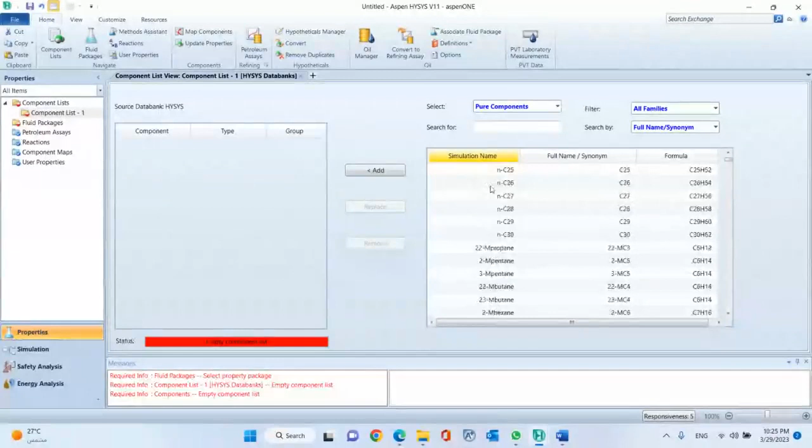So once you start a new simulation in Aspen HYSYS, it will direct you through the properties environment. In the properties environment, you will need to identify what are the components that you will use in your system. For example, when I click on add, it will give you a huge database of components, from hydrocarbons to petrochemical products, and many.

So the way you search for a component is basically you can scroll, or you can type in the components that you're looking for, such as hexane, water, and then once you find your component, you can double click or you can click add and it will appear on your selected window. So once you select your component, you will need to select a fluid package.

What is a fluid package? A fluid package is nothing but a set of thermodynamic equations of state. And if someone can remind me, why do we use thermodynamic equations? Yes, go ahead, please. To correct the non-ideality of the solution or the gas.

Correct, yes. But I want something more basic, like, let's assume that I'm gonna use an ideal equation of state. So why do I need it? To minimize the percentage error, because the fluid package gives you more precise values. But what will be the outcome from the package? To get the other properties: if I have one constant property of a gas, like the pressure, I get the other properties by the equation of state.

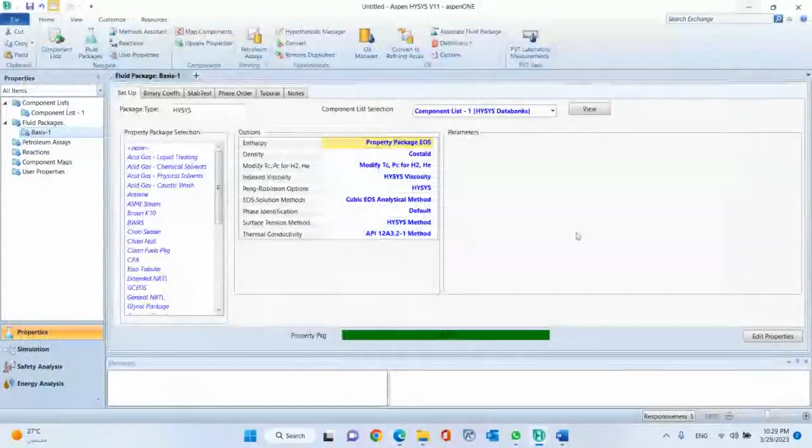I'm not sure if someone is raising hand or something, but I would prefer if we can just open the mic and let us chat together while I'm viewing the screen. It will be hard for me to read the chat.

I think it depends on the pressure and the state of the component itself. For example, if it is liquid, you cannot use the virial equation of state. And if the pressure is high, it's preferred to use the van der Waals equation. Excellent. So pressure can play a role. Why is pressure important? I mean, what does it mean if the pressure is high?

If you recall from the ideal gas equation of state, what are the assumptions that we have? That the pressure is what? Proportional to the temperature. When you increase the pressure, the temperature will be lower. But is the ideal gas equation of state applicable at high pressure or low pressure? Low pressure, almost 1 bar or 1 atmosphere.

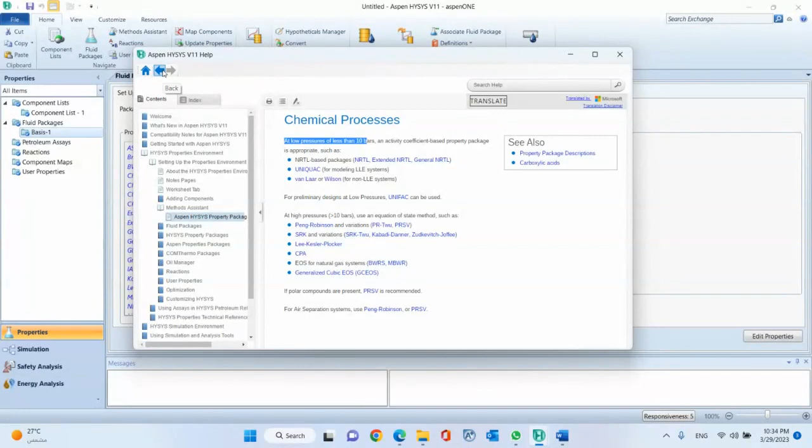So you can take a look at that, and from those lists, it will guide you to the most appropriate fluid package. Other option is that you can actually go through the literature and explore yourself. For example, if you see a literature that is utilizing process simulation or calculating thermodynamic properties for a certain set of system, then you can see and correlate what is the most suitable equation of state to use. Else you can go to the help document, which is very useful.

So normally this is, let's say, the most basic function of the first environment, which we talked about, properties. This is where you set up your components and the basis to calculate your thermodynamic properties of a system. It is very simple. Sometimes you can actually have a mixture of components, such as, let's say, methane, ethane, butane, etc., like a mixture of hydrocarbons. And when you have a mixture, you have interactions between the two components.

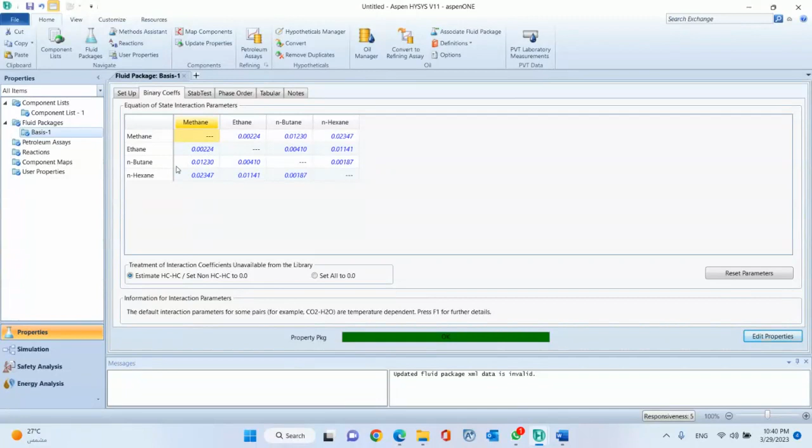However, for most of the cases, especially when you have an ideal mixture, like hydrocarbons, and especially when you are using a cubic equation of state, most of the time you will not need to define those binary coefficients, because they will pop up by default, because Aspen is storing those and it has a huge database in it. But in case it was needed, you can easily look it up in the open literature. They are widely available for most of the systems.

So while I'm explaining, I would actually like to pull up the assignments, and from there we can just have a look and try to apply the thing. Of course, I will try not to solve it, but we will try to see what are the kind of features that you will use in Aspen HYSYS to help you solve this problem and inshallah future problems that you have in your career or your academic life.

So the problem statement is to design a distillation column that will separate a feed of 50-50% water and methanol at 25 degrees Celsius and 1.4 bar, with methanol recovery of 95% in the distillate and recovery of 99% in the bottom. So we are assuming a total condenser operating at 1 bar, and we are using SRK as the property method.

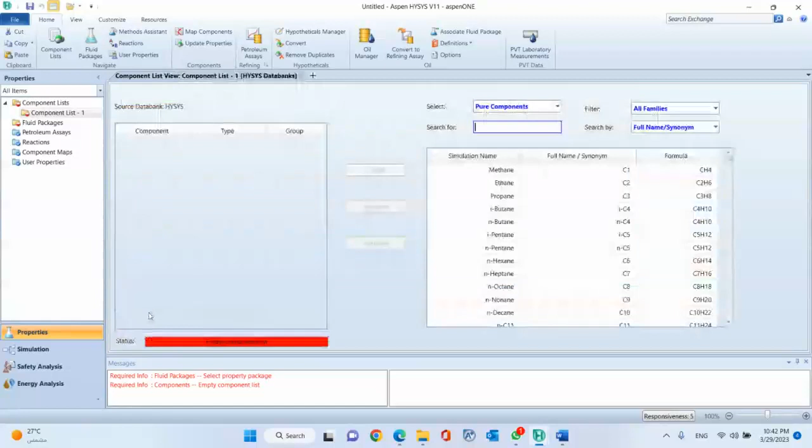So we know we have a system that is consisting of water and methanol. So if I open a new case, again it will take me to the property environment. The first thing is that I need to define my components. So I just simply click add, and from here I just simply type in the components that I'm looking for, such as water and methanol.

You can, by the way, search by the name, or you can search by the chemical formula. So you will have different options. Let's say, for example, if I want to select ethylene, which is C2H4, I will search by the formula and it will give it to me. So I've selected my components, and I see the green mark is ticked. That means I fully defined the component list.

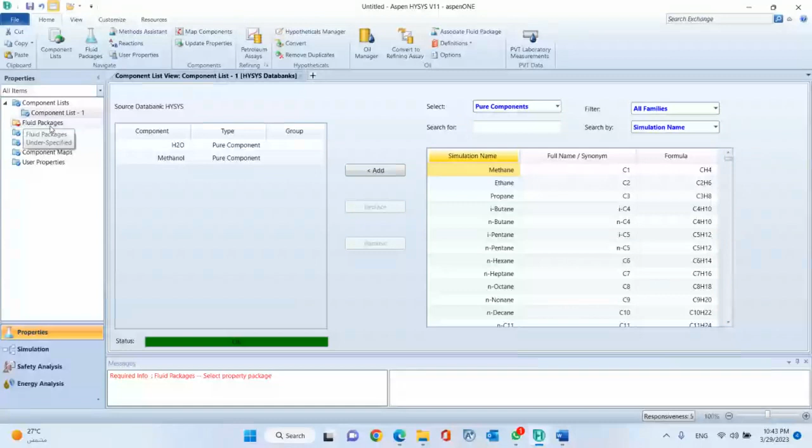The next thing, which is shown in red, is the fluid package, which is the thermodynamic equations that we are supposed to select. As per the problem statement, we are supposed to use SRK as the property method. So when I click add on the fluid package, I will scroll down until I find SRK. Once I select it, you see it gives me OK green. That means there is nothing else that I need to input in the property package.

And by that, I finished setting up my property environment, and now I can move to the simulation environment to start building my flow sheet. Once you open up your simulation environment, you will have your flow sheet, your top ribbon, and the model palette, which includes all the unit operations or logical operations that you will be using to build up your flow sheet.

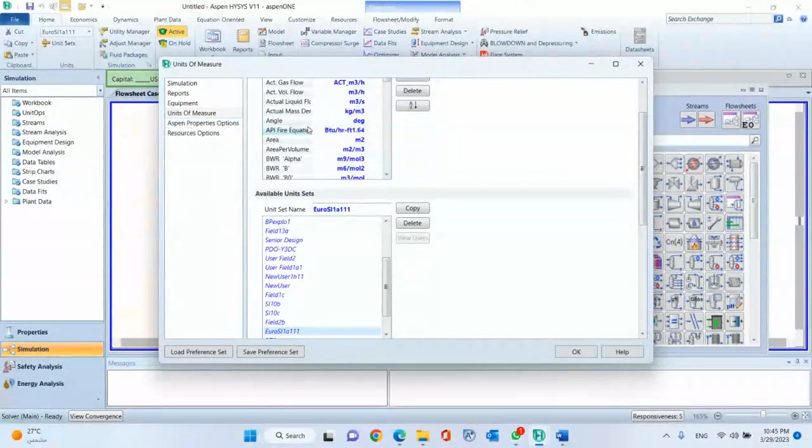Just quickly, I want to give you an overview of the several different functions that we can use in the simulation. Starting with the home tab, this is where you define your unit of measurement. If you are interested to customize your units, let's say your energy, rather than calorie, you want it in kilowatt or megawatt, you can change that, and you can do the same for mass flow rate, pressure, temperature, etc. You can select your preferred set, like SI unit or English unit, etc.

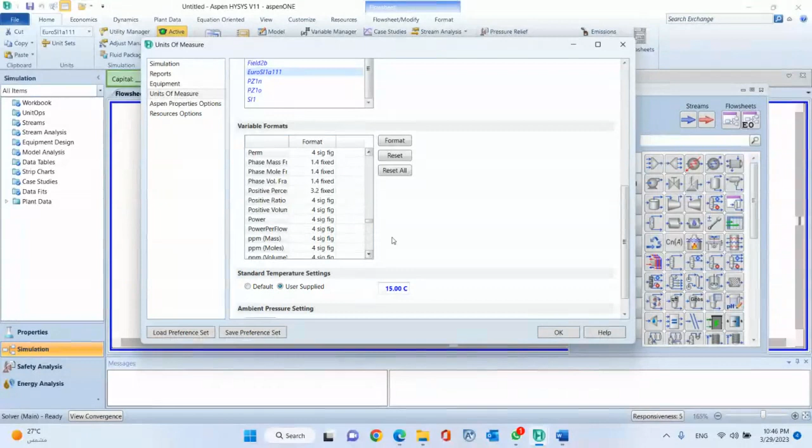And you can also customize the display of your numbers, for example, how many decimal points, how many significant figures you need for each of the variables. You can also define your standard temperature and ambient pressure here. Most of the cases you don't use those, but in case you want to define your standard volume flow rate, you will need to play with those parameters. Once you are happy, you can click OK, and you have your unit of measurement set.

Next, you will have your fluid packages in case you have multiple thermodynamic equations. By the way, you can use multiple thermodynamic equations in the same simulation, but that is an advanced level that we can inshallah cover in upcoming workshops. You also have your utility manager in case you are using utilities such as electricity, steam, cooling water, and you want to calculate the cost of your utilities.

This is important, which is your solver. It should be on active, because if it is on hold, your flow sheet will not solve. So sometimes if you put your input and you are trying to get the model solved, but nothing is happening, most likely your solver is on hold, so make sure you activate it.

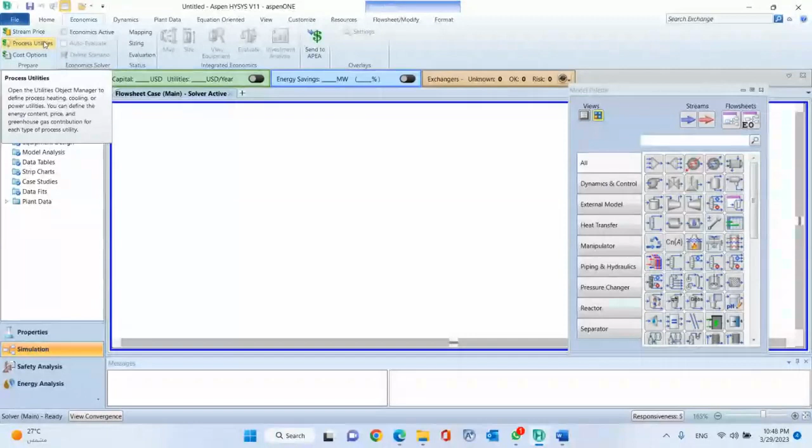You also have economic analysis, and this will be helpful for you in your senior design year project, to help you in the simulation when you are doing your process economics, and it will also help you in your career to quickly build up your business case.

Most of the cases we are dealing with the steady state, and even when you go to the plant, the majority of the cases that you will be dealing with is a steady state. Can someone tell me what a steady state means? What does it mean when they say the process is in a steady state? Does not change with time.

Yes. So the variable is constant with time, although in reality you will not see a variable like a temperature that is constant over time, but on average the fluctuation is considered like a steady state. So that's why most of the time in real life we simplify the process to be a steady state. Otherwise, it will always be complicated to solve an issue or to model a process in real time.

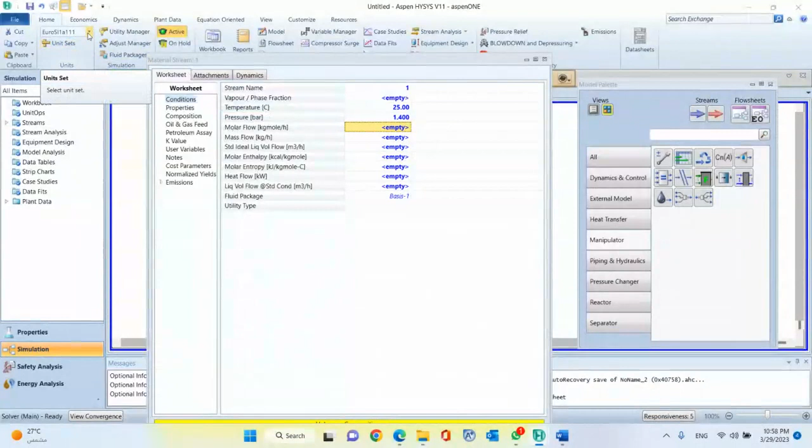Okay, so in our case, we are given the temperature, which is 25. We are given the pressure, which is 1.4 bar. By the way, as you can see here, the units are set to Celsius, bar, kilogram per hour. If that is not the case for you, you can change the units from the unit set that you have in here, or you can build your own.

Next, we are given the molar flow rate, which is 100 kilomole per hour. So in this case, I will input the molar flow rate. You see here it says kilogram mole, which is the same as kilomole in our case. And then it is a 50-50 mixture. Normally I don't write the numbers directly. I would go to edit, and then specify whether I need to define it on mole basis or mass basis, or in terms of flows rather than fractions. In our case, it is 50-50 mole percent, so I'd keep it at mole fractions, which is 0.5.

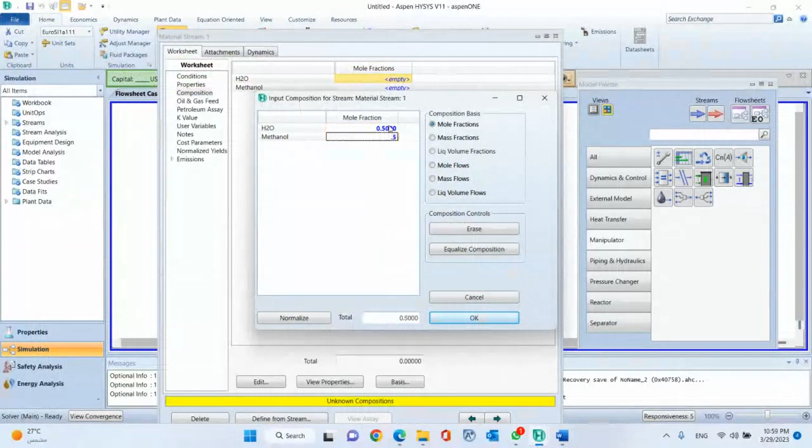So once I click OK, you see the status turns into OK. And if we go back, we see the rest of the variables are defined, and you can also see the properties here populated, like density, molecular weight, heat capacities, etc., which are calculated using our thermodynamic equations of state. So we have defined our stream.

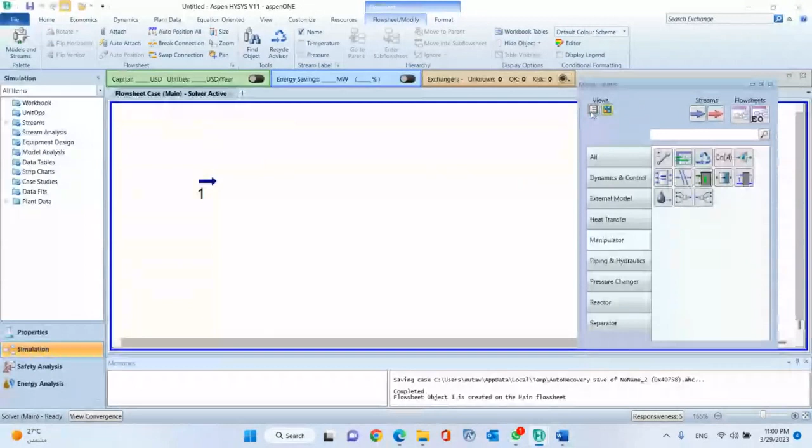So let us explore some of the tasks and some of the features in the process simulation to help us conduct those tasks. The first thing is to plot the XY equilibrium curve using HYSYS. So can someone tell me what is the XY equilibrium curve? What does it give us? What is the use of it? We can determine if we have azeotropes in the mixture itself when separating the components. Exactly. So we can look at the nature of the mixture, how it is behaving. Is it ideal, non-ideal? I can use it to do the manual calculation, like the McCabe-Thiele method to determine the number of stages. I can do many things with it.

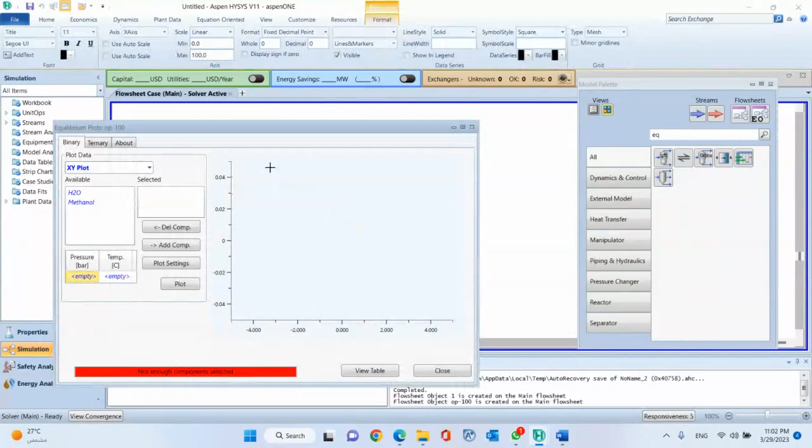So how do I plot the XY equilibrium curve? Basically, on the model palette itself, there is a unit operation which is called equilibrium, those opposing arrows that are shown in here. You can just simply double click on them, and this is where you determine your equilibrium plots, if you have a binary mixture, which is a mixture of two components, or ternary mixtures, a mixture of three components. In our case, we only have water and methanol, so it is a binary mixture.

What we need to do is go here on those components and select or add them, because sometimes you will have, let's say, 10 or more components. So whatever binary mixture you need, you should click on it and select add, so that you activate it in this unit operation.

Then what is it that you are plotting? Are you plotting an XY plot, which is the vapor versus liquid curve, with liquid on the x-axis and vapor on the y-axis, or are you looking for TXY, where you have temperature on the axis, or PXY, where you have pressure? In our case, we are tasked to plot the XY equilibrium curve, which is the selected plot in this case.

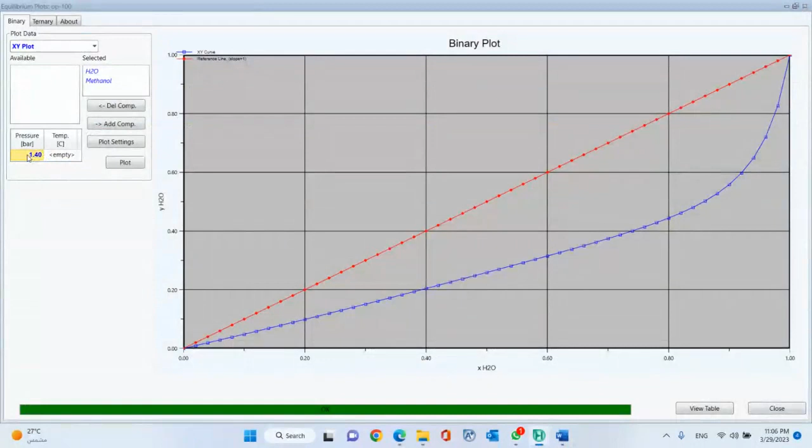You can select whatever pressure you want. It depends on the conditions that you want. Okay, so we are doing the equilibrium at 1.4 bar, but yes, if we want to do the distillation at 1 bar, then you are absolutely right. We need to do it at 1 bar, and then we can update the plot and generate it once again. So yeah, this is a good point.

You should do the equilibrium at the pressure or conditions of your equipment, not your feed, or you should know the conditions at which you are separating your components. But yeah, this is a good point. Thank you very much. So I'm hoping that this is clear for everyone. If anyone has any questions... Okay, so I'll take it that this is clear. Please feel free to interrupt if you have any questions while we are explaining.

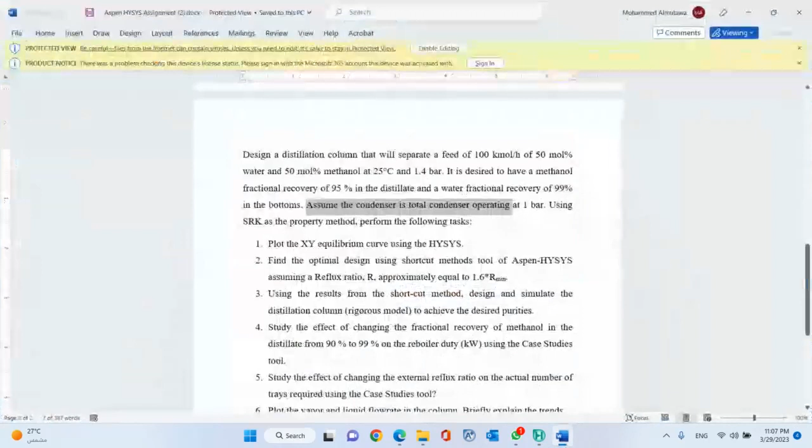Okay, so now we are getting into the heavy stuff. Our task is to design a distillation column to achieve our objective of 99% recovery of water at the bottom and 95% recovery of methanol at the top. So in 306, when you normally do hand calculation, how would you design a distillation column? What is the tool that you would normally use?

Or okay, let me put the question like this. When I tell you to design a distillation column, not sizing, but in terms of the number of stages, what would be your approach? What kind of tools would you use to determine the number of stages? McCabe. Equilibrium curve and McCabe and CMO. Yeah, and how would you use that method?

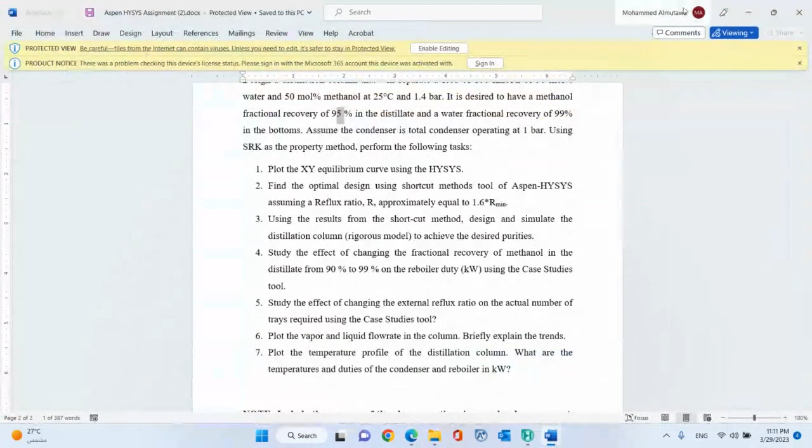So what we are going to do here is not use the McCabe-Thiele diagram, but other methods that will help us design our distillation column. Now, if I simply go and select a distillation column, this is, by the way, your distillation column, and try to define it, it will ask me to input the number of stages and to define other parameters when I try to configure it. At this stage, I don't even know the number of stages to input into this configuration window. So this will not really help me.

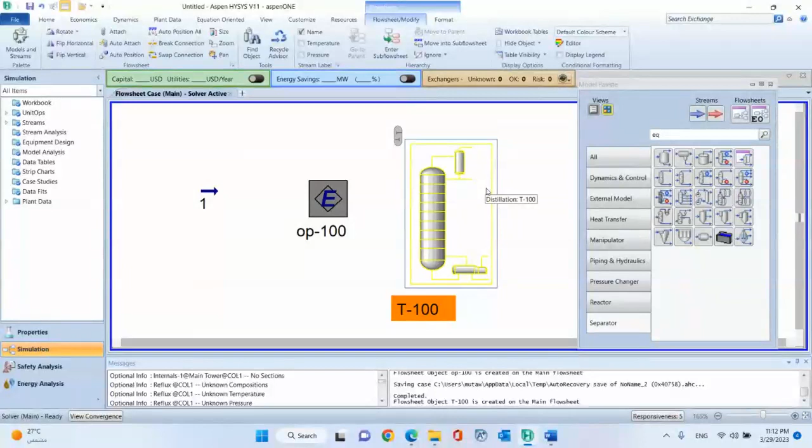So one way is that I can do the McCabe-Thiele offline and determine the number of stages and the feed stage from there. Else, I can use what is called a shortcut distillation. In the shortcut distillation, I can supply a few inputs, and it can calculate for me the majority of the variables that I would need to configure my rigorous distillation model.

So I would use the shortcut not as a final model, but I would only use it as a start guide to determine the number of stages, the feed stage, etc., like for initial results. And then I will take those results and convert it into a rigorous distillation column.

So once we have the shortcut column, basically what we need to define is the connection into and out of the column. Our inlet would be our feed, which is the feed stream we have just defined. And then I need to define an energy stream for the condenser duty. I can just write in any name like QC, which is for condenser.

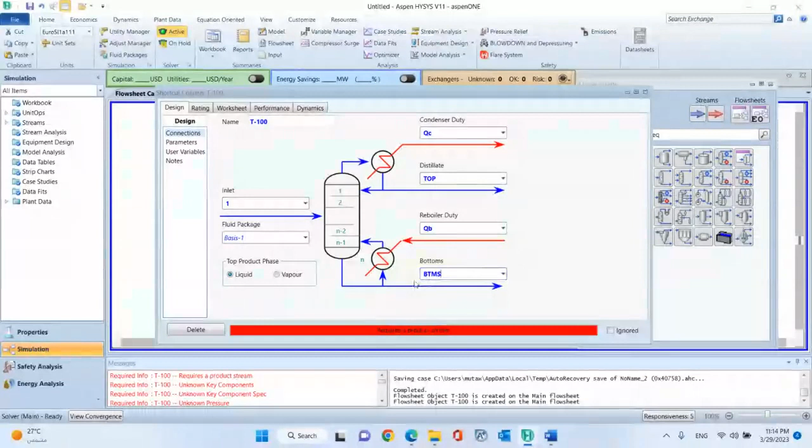And then distillate, say anything like top. And then reboiler duty, for example, QB. And then bottoms. So now it's important here to say whether our top product phase is liquid or vapor. So how do I know if my product is liquid or vapor from, let's say, this problem statement?

It says a total condenser, so it's liquid. Okay, excellent. Very good. So if we have a total condenser, we will have a liquid. What other kind of condensers might we have? Partial condenser. Partial condenser, and what would be the products out of that condenser? A mixture, gas and liquid. Yes. So it's not only vapor. Excellent.

You don't need simulation. خلاص, you can solve by your own.

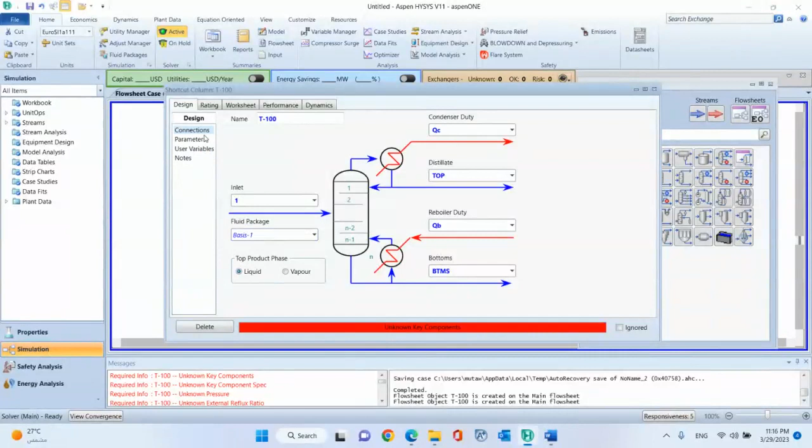Very good. So now I define the connections. In the status bar, it will give you hints sometimes what is the next step you need to do. Once we define the connections, we can go to the parameters tab. And in the parameters, I define, I think this is also something we have come across, the light key and the heavy key components.

What does a light key component mean, or heavy key? More volatile and less volatile. Let's say I have a mixture of 4 components: ethane, propane, butane, and pentane, for example. Will the light key always be ethane? No. Why? The light key component will be the component that we want in the distillate. Yes, exactly. Which is our main product, right? Yes. And for the bottom, which is the heavy key, it will be the same thing.

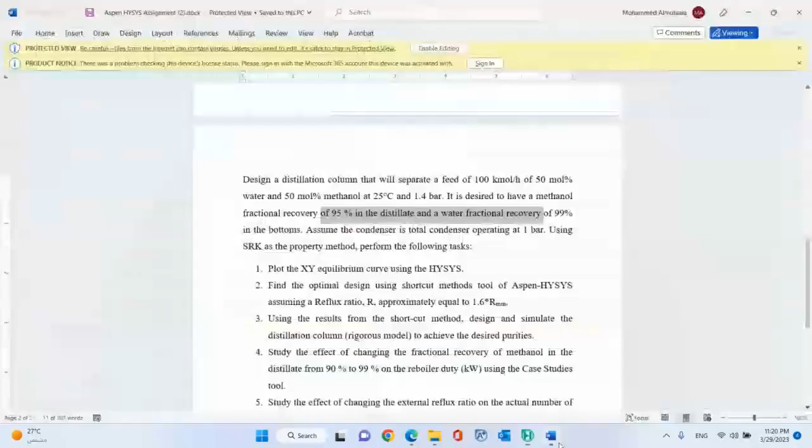Now, in the problem statement we are given a flow rate, which is 100 kilomole per hour, a composition of the feed, and a recovery. However, the simulation is asking us for mole fraction: mole fraction of the light key in the bottom and mole fraction of the heavy key in the distillate. We don't have that in the problem statement. How can we get it?

He said in the question fraction recovery is 95 for the distillate. That means D times XD is 0.95 times 0.5 times 100. And the same for the bottom. So you mean we will calculate the component mole flow rate, all right? Is that what you're saying? Let us set up an Excel calculator here very quickly.

Okay, so we have our F, our feed, and then H2O recovery, and then methanol recovery. So here we have 100 kilomole per hour, and this is 95. So this is 0.99 recovery in the bottoms, and this is 0.95 recovery in the top.

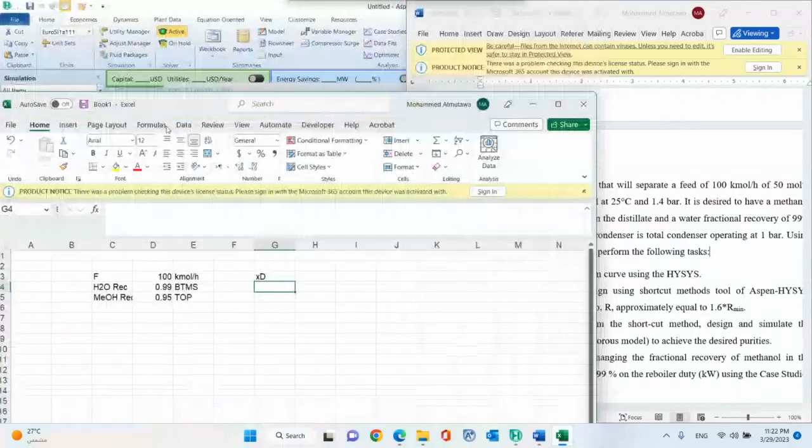So how do we get XD, or let's say, how do we get X methanol in the bottoms from the given information? Of course, we have here the composition, feed H2O, and then feed methanol, 0.5. So can someone help me how to do the calculation?

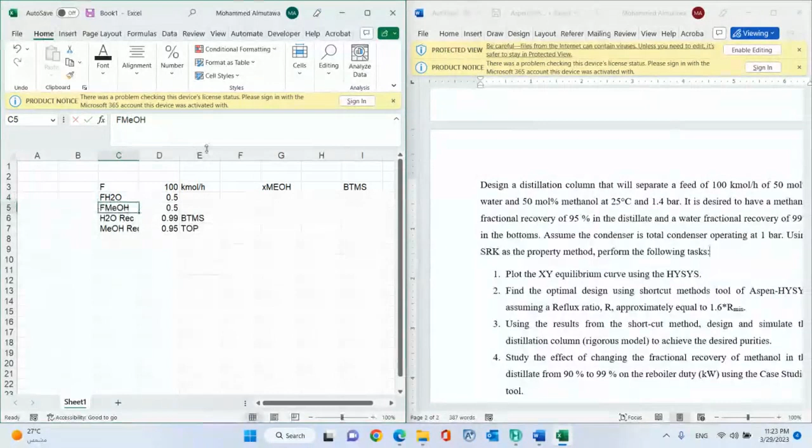We need to find the distillate and the bottoms first. Okay. You mean the distillate what, mole fractions or flow rates? Flow rate, so we can get the mole fraction. Okay, how do we do that? We can say 100 times 0.5 times 0.99 or 0.95, and then we add it to the bottoms, so we get the distillate. Okay, so what should I do? If you just guide me through the calculation.

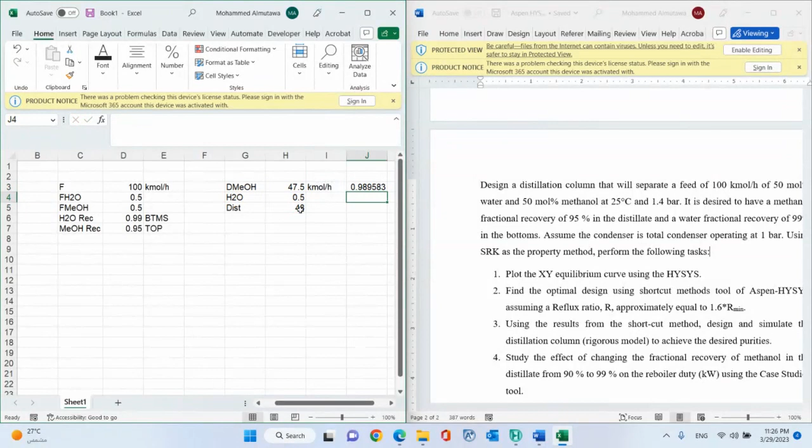And the summation, this would be your distillate flow rate. You divide the flow rate of the component by the total flow rate. This would be your mole fraction XD. However, what we are looking for, or what the simulation is asking, is the water composition in the distillate, which would be 1 minus XD, which is this value. So we need to do this for water, and then do the same for the methanol.

So what would be... 0.5 divided by 48. Divided by 48? Yes. Okay, this is the heavy key in the distillate. Yes, exactly. So it can be either 1 minus the XD for methanol, or 0.5 directly divided by 48. Now, what about the light key in the bottom? How do we find that? One minus what? For the heavy key in the distillate, you mean? No, the light key in the bottom. We already found the heavy key in the distillate and plugged it into HYSYS. But what about the light key in the bottom?

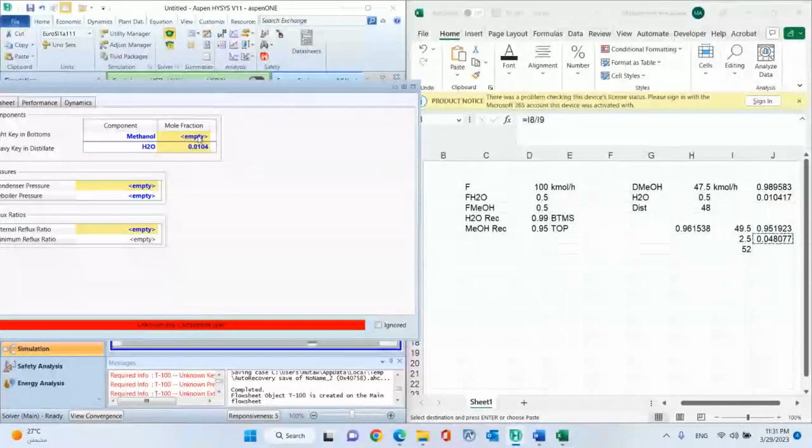Let us do the same practice, and this will be your 49.5, and then what would be your methanol? Multiply this by 0.05, correct? So your water would be 49.5 divided by 52, which is 95%. And your methanol is actually 2.5, which is this value, correct? Yes, correct. So we have defined the mole fraction. I know it's simulation and we still had to do some hand calculation, but sometimes there is no escape.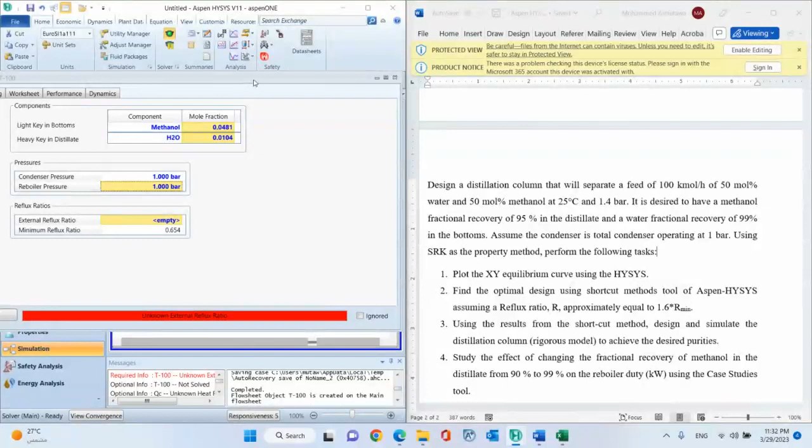Then the pressures from the problem statement. We have the condenser pressure, operating at 1 bar. I don't see anything mentioning the reboiler pressure, so we will assume 0 pressure drop across the column, meaning the reboiler pressure is the same as the condenser pressure. The simulation will calculate the minimum reflux ratio, and this is good because number 2 says find the optimal design using the shortcut method tool of Aspen HYSYS, assuming a reflux ratio equal to 1.6 times R minimum. So in the external reflux we put 1.6 times 0.654.

So once we do that, heavy calculations. Sorry if someone said something. Okay.

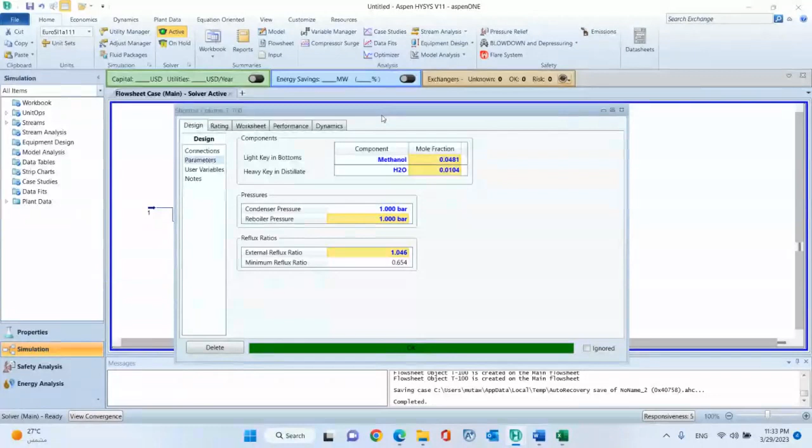Once we do that, we solve our model. So what is the goal of doing all of this? We need the stages needed for separation, feed stage, and the reboiler duty. If we go to the performance tab, we can see the calculated results: the minimum number of stages, the actual number of trays, the optimum feed stage, the condenser and reboiler temperatures, and the condenser and reboiler duties. We have those numbers in front of us.

As you can see, the shortcut column gave us the majority of the data we needed to build our distillation column based only on the product fractions, pressures, and the external reflux as a function of the minimum reflux ratio. So it only requires minimum input.

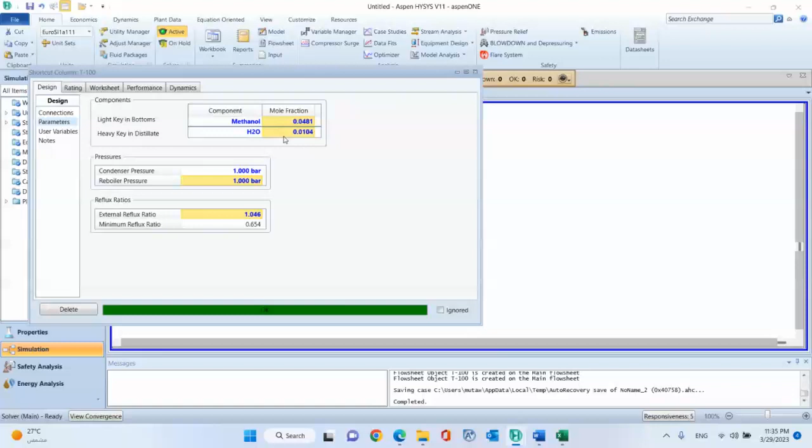And so you get your results for the shortcut here, which is the number of stages, and then you can also get your product stream properties from this worksheet, as well as the compositions. So now you are able to obtain your number of stages, or let's say your distillation column design.

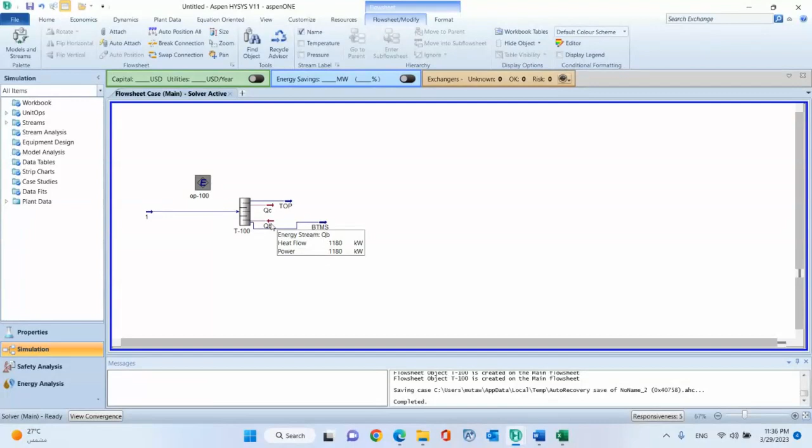So far, anyone has any question on whatever we have done? Or, inshallah, you will feel confident that you know how to use a shortcut distillation column. Explained properly. Sorry? I said it is explained properly. Thank you.

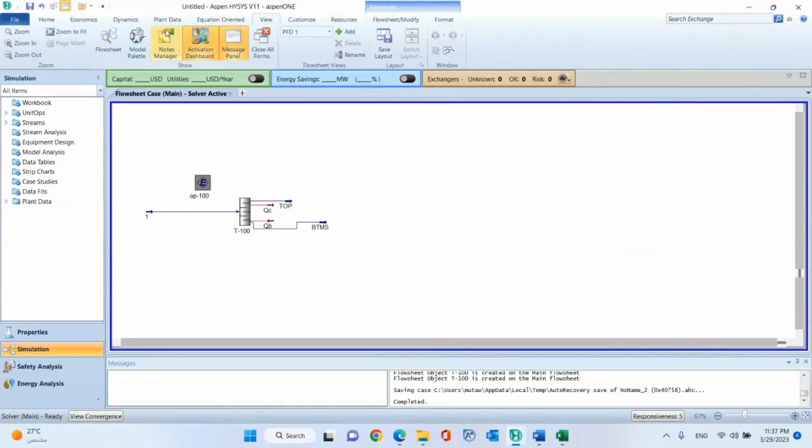طيب الله يعطيكم العافية. So the goal is only basically to get those basic data, which is the number of stages and the feed stage. Sometimes when you close this model palette by accident, you can simply go to View and click on model palette, or you can press F4 and it will pop up again.

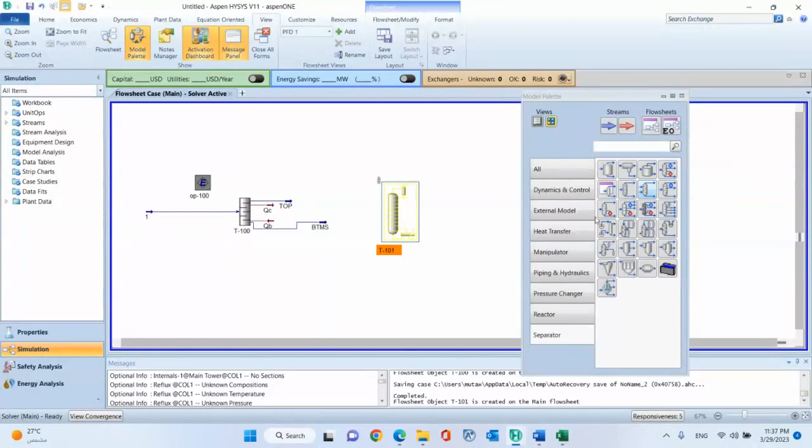So using the results from the shortcut method, design and simulate the distillation column. Next, as we said, the shortcut in the separators is not your distillation column design. It is just a way to get the data you need to design your distillation column. So you go again to separators, hover the mouse over it, and you will see that this is the distillation column. There are other columns as well, but this is what we will need.

The page is a little bit more complex, but we still need to define our feed stream and our stages, etc. Now the feed is already connected to the shortcut. So I can just type in feed, for example. It will generate a new stream for me. I will show you later on how we can define it.

Then again, I will simply redefine the streams. We said here that the condenser is a total condenser, so it will remove the vapor product. So this is the overhead. I'm just changing the names here because HYSYS doesn't allow me to replicate the names over and over. And Q boiler. And then here, this is bottoms. Okay, I already defined bottoms.

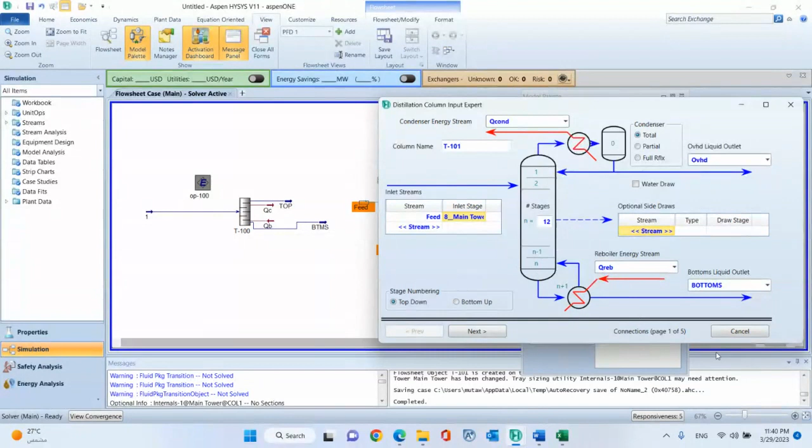Always, if you have a fraction of a tray, even if it is 0.1 or 0.9, you should always round it up. So in this case, we have 11 point something, so we should always round it up. And then similarly for the feed stage, it was 7.5, so we'll put 8. Once you define those parameters, you can simply click on next.

This is to select the configuration of the reboiler. In most cases, you don't really need to change anything. You just leave it as default. If you are simulating an existing column, for example for industry, and you know the configuration of the reboiler as circulation with a baffle, then you can configure it as that. But for now, the default is more than sufficient for us, and it is simple to solve as well.

So here we will define the condenser pressure, which is 1, and the reboiler pressure. In real life, you normally have the reboiler higher than the condenser, but it is a fair assumption to assume no pressure drop across the column so far.

If you have a complex system, a complicated distillation, sometimes you need to provide estimates. It will help in finding the solution quicker. But we have a simple system, so we really don't need to bother putting a temperature estimate. But if we need to, we already saw that we have the condenser and reboiler temperatures, so we can supply them.

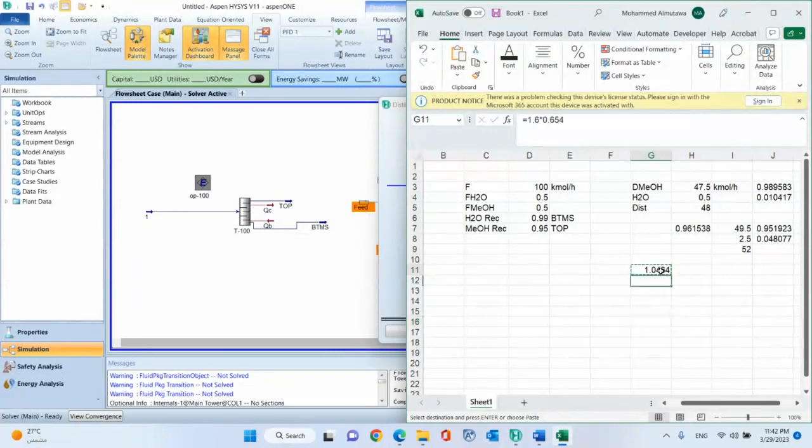So here we can define the reflux ratio or the liquid rate. We have just defined the reflux ratio here, which is 1. This value. So I will just input the value in here, and then خلاص, I will select done.

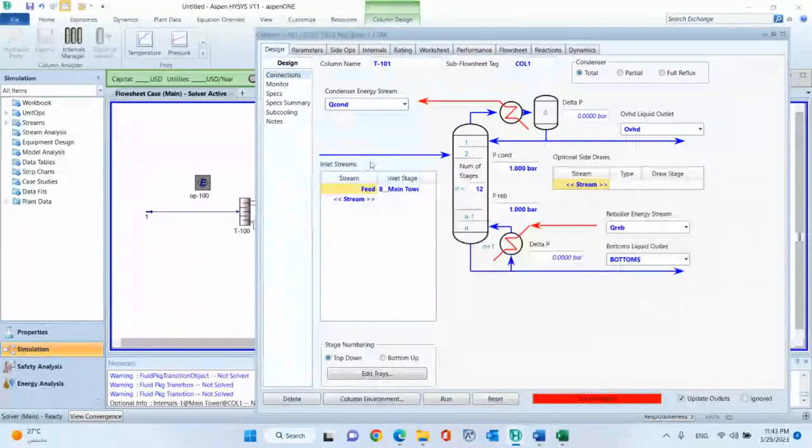We can always go back and change, add even more specifications than the liquid rate, or put nothing at all at the beginning. We will see how we can specify the column. So I will open both. Good. Okay, very good. So on the left hand side, this is the shortcut column result. So yes, I think we did the number of trays correctly. Very good.

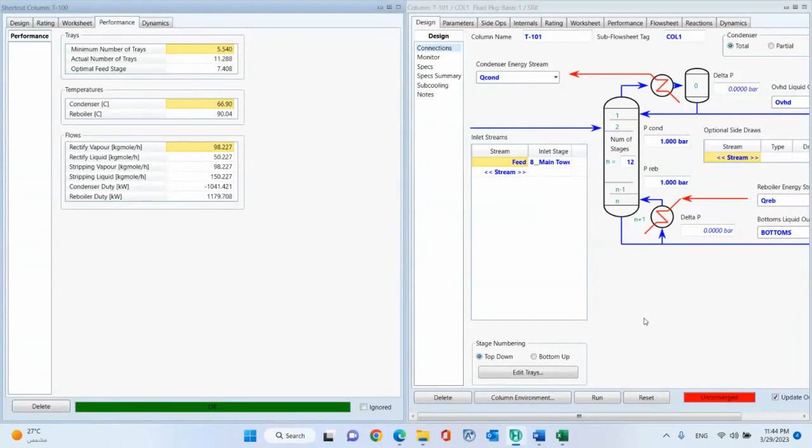So once you build your distillation column, you need to solve it. But before you solve it, you should go to the monitor. And by the way, this is maybe the most complicated system or unit operation most of the time in process simulation, and it is most of the time painful to solve.

So what do we have in here? What we can see in this monitor for the distillation column, we can see what are the specifications that we are specifying and what is our degree of freedom. So we have 2 active specifications, and these specifications indicating our degree of freedom is 0. That means we need 2 specifications for us to solve the system. So let me just deactivate those. You see the degree of freedom will update to 2. That means we require 2 information so that we can solve our system.

So I have the reflux ratio. Okay, good. That means I'm still left with 1 degree of freedom. Now here I am free. I can specify the distillate rate. I can specify the composition of the distillate. I can specify the recovery. I can add a specification here, and you can see I have many options. I can specify the duty, I can specify the recovery, I can specify temperatures, for example, across the column. So many options I have in here.

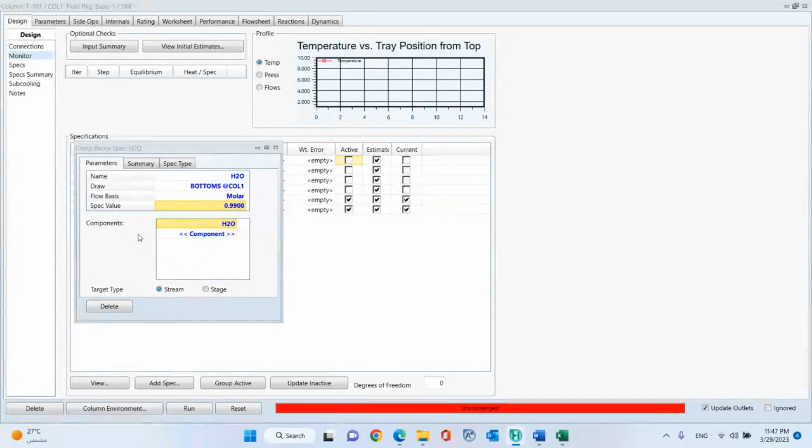I will add another specification for water, which is H2O, and this will be in the bottoms on molar basis as well, is 99% of water recovery. So this will be the fractional recovery of water, and then I will also click on exit. Now what I need to do, okay, I have the degree of freedom, I have the two specifications defined. I need to hit run. Okay, why did it not solve?

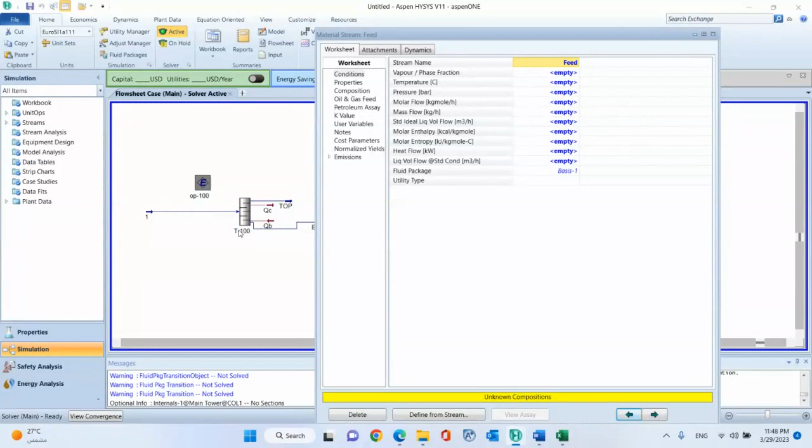Because remember, we have defined the feed, and the feed is empty here. We need to input the information. I can either do the entry of the information manually, as I did for the first stream, or I can do a quick trick and copy the information from this stream to my feed. So in this case, I select define from stream and select my stream, which is number 1, and then click OK. So it will take all the data from that stream to my new stream, and you will see all the information is copied exactly. And I can change it if I need to. Now, once I define that, you see my column has solved.

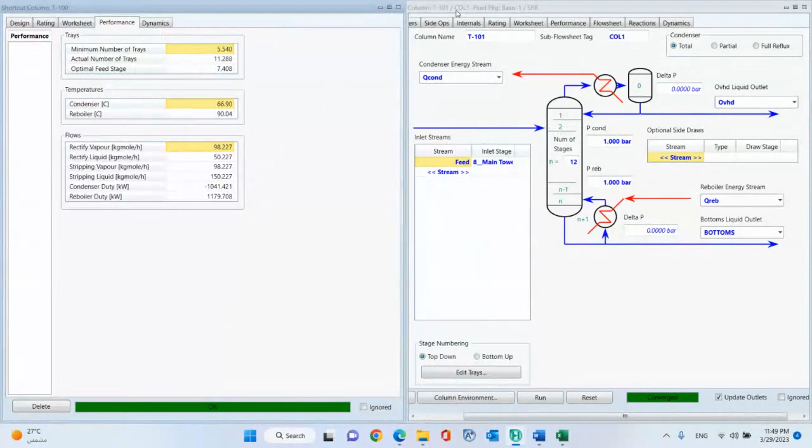Very good. So let us just quickly explore the results. Now, let us see just comparing the condenser duty or the reboiler duty, whichever. Now here, for example, the condenser duty is 1,531 kilowatt, while here it is 1,041.4 kilowatt. Similarly, for the reboiler duty, this is 1,600, and here it is around 1,200. So why do you think there is a difference?

Did we do something wrong? Maybe because in the first one, it depends on the reflux ratio, and the second one on the fractional recovery. Okay, but aren't we supposed to? Because okay, yes, this depends on the recovery, but also here in a way we input the recovery. I mean, we input the mole fractions that will basically be translated to the recovery.

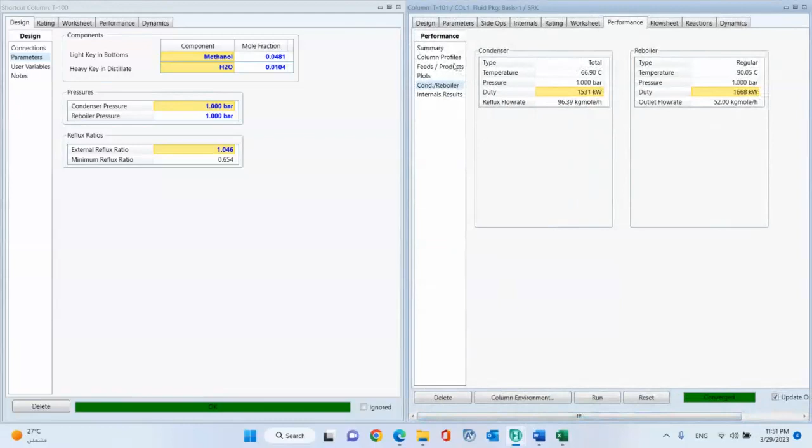In fact, let me even show you something. If I go back to design and monitor, our reflux, what we said here will be 1, right? But you see the calculated reflux is actually 2, so it's almost double the reflux that we anticipated at the beginning. So why are we having such a difference? Again, it is different equations, different models. A shortcut is a shortcut. It is a very rough, quick estimation for the number of trays, the feed location, etc.

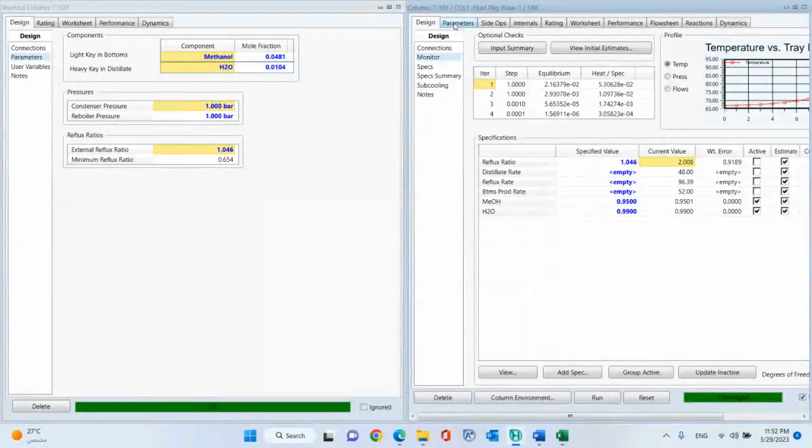While the rigorous distillation does tray by tray calculation, and it gives you more accurate results than the shortcut column. So if you are to use any of the two, you should use the rigorous distillation column and not the shortcut, because this will give you more likely reliable results.

So if I want to estimate the duty, I will not look at the duties here in the shortcut. I would rather be more confident with those values than the shortcut column, because shortcut is a shortcut from the name itself. So the calculation is different, formulas are different, and the purpose is different. Here I'm trying to simulate an actual distillation column, whereas here I'm trying to get initial estimates to build my actual simulation column. I hope this is clear.

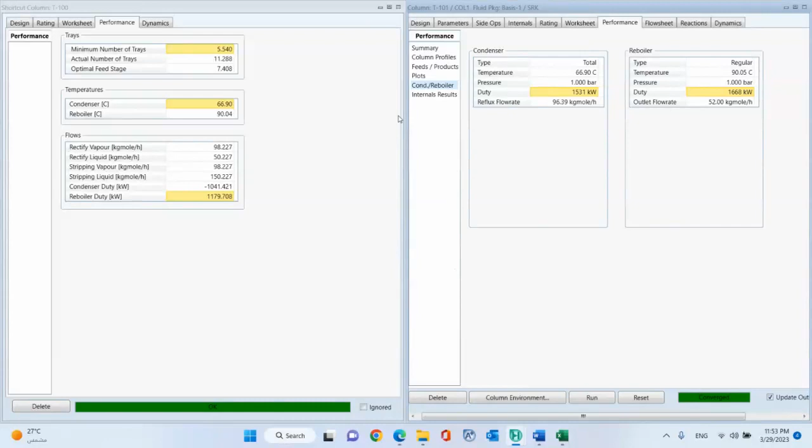Excuse me. Yes. What is the specification you put when you add the specification for the fractional recovery? What is the name of the specification? Okay, so you can add a spec. Once you click on add spec, you will have this menu. So what I selected is column component recovery, and this is just one way to specify the column.

You can specify other parameters. I can specify the reflux ratio, for example. Let me disable one of the component recoveries, and I will specify the reflux ratio. So when I solve, you see it will solve, but now it will give me a fractional recovery for water that is different than 99%, because I need higher reflux ratio in order to satisfy the fractional recovery. So I would always prefer to specify mole fractions or my target recoveries and have the other variables calculated.

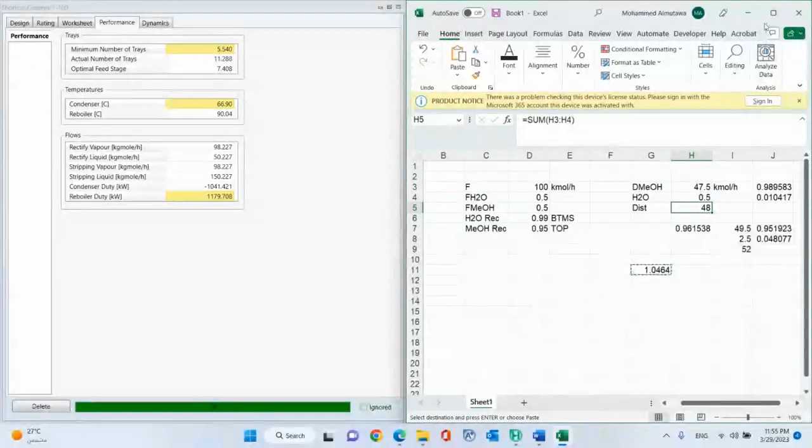Otherwise, I can specify the flow of the distillate or the flow of the bottom product, but I need to check my predicted mole fractions and all the other calculated parameters and ensure whether they are realistic, reasonable or not. So what we see, for example, distillate rate is 47.99, which is almost 48. Correct, it is matching our calculation, and then 52 for the bottom products, which is again very good.

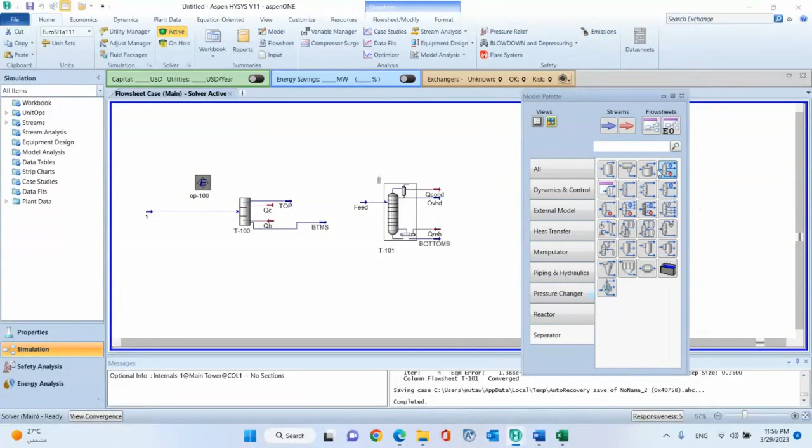It will not solve. What I did is that I defined basically the feed stream so that I was able to solve my distillation column model. Clear? Yes, yes.

Excuse me, I have a question. You said for the shortcut method, we cannot rely on the results of the heat duties. But why can we rely on the number of trays? Okay. It will give you number of trays and it will give you feed trays. The optimum feed location, right?

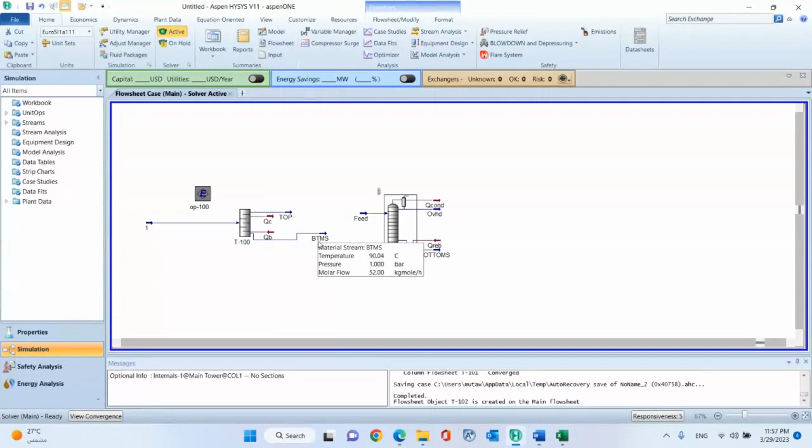So let's say you are working in a distillation column design company, even when you get those number of stages and the feed stage, and you directly try to design an actual distillation column with those figures, most likely you will not get the correct design. In fact, almost always you will not get the correct design. This is initial to help you set up your distillation, but then there will be many factors that will play.

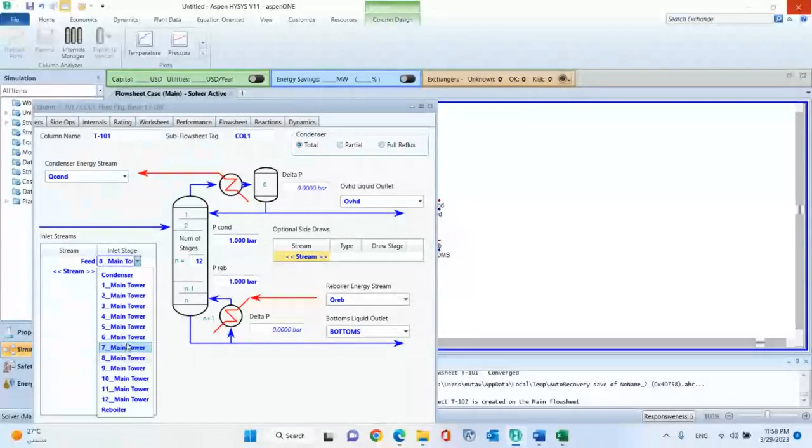And let me ask you a question. Now we selected stage 8 as a feed stage. I can maybe most of the time alter the feed stage by 1 or 2 stages and it will still solve. I can select 7, maybe it will solve. Yes, I can maybe even select 6. I think it should solve. Okay, it will solve.

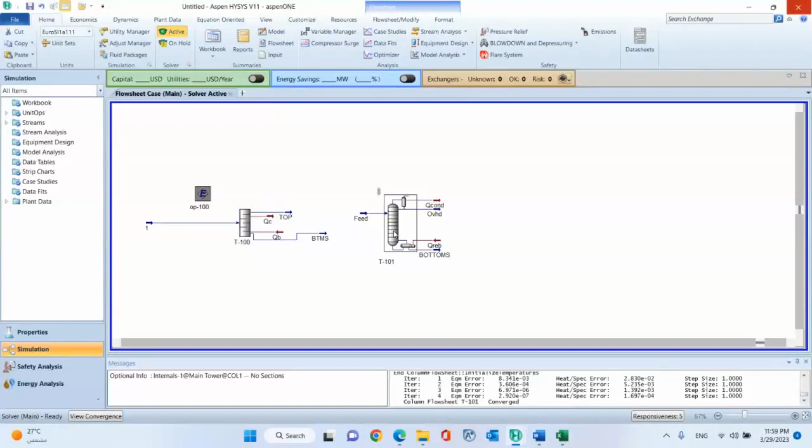So this is 12 stages. Here we are assuming 100% efficiency of the trays, which is never the case in real life. You might have efficiencies down to maybe 60%, and the efficiency will not be the same for every stage. So that means this will be only a starting point. Then you will need to study your system, and depending on the type of trays that you are configuring, which is something else you can do in HYSYS, it will give you more realistic performance for your distillation column.

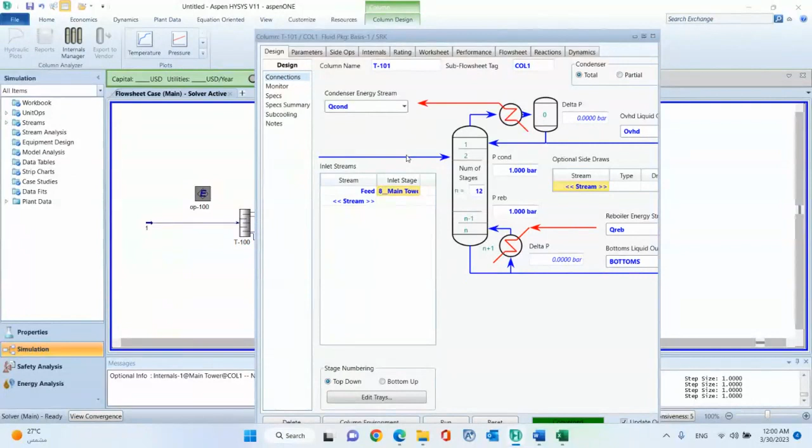By that, you might need to increase the number of stages a little bit to achieve the separation, or you might need to change your feed location to optimize the energy both on the reboiler and condenser. So the number of stages, the feed location, for our purpose here we can rely on it, but when you go to real life, you will still need to do a huge exercise in selecting the number of stages and the actual feed location.

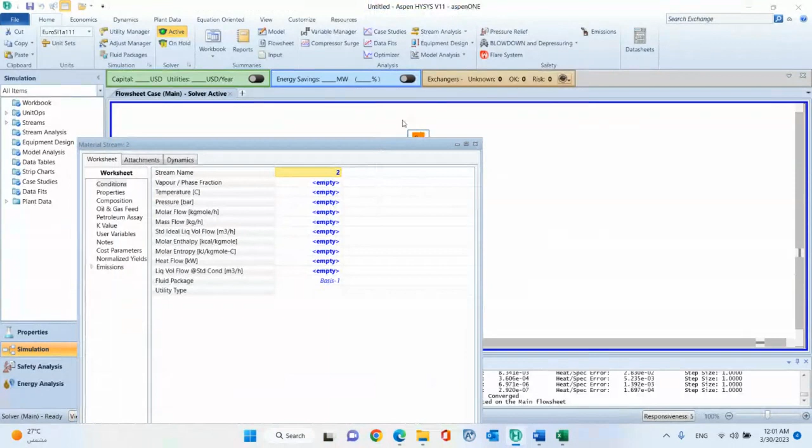I can double click, I can go to define from stream, select the stream which is going to the shortcut, click on it and then click OK. It will copy all the data in here. So this is basically what I did for the rigorous distillation.

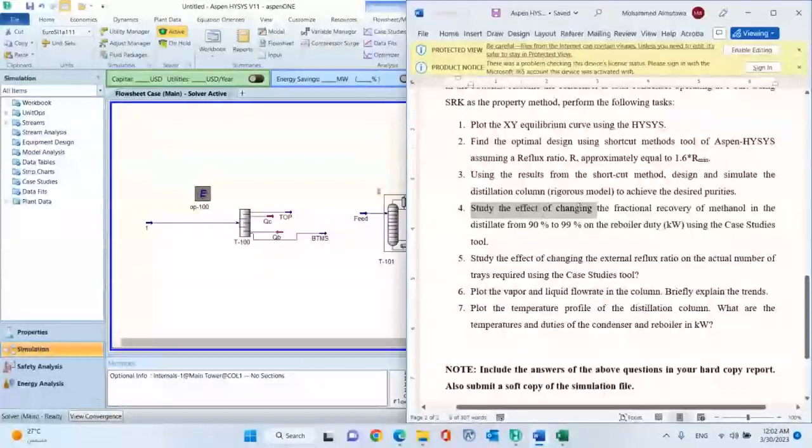Okay, so I'm not gonna attempt to solve all of the homework, but I will try to show you the tools that you would need. For example, let us quickly go through the questions: using the results from the shortcut, design and simulate the distillation column. We actually did that. But study the effect of changing the fractional recovery of methanol in the distillate from 90 to 99% on the reboiler duty, using the case studies tool.

So this is what we saw earlier. We have a tool here that is called case studies. And what this will do, basically, you are trying to study the effect of one variable on your model. So you will change one variable and you will see how the results will change. You can do that manually. I can go to monitor, change the recovery step by step, and plot the data for the reboiler duty, for example.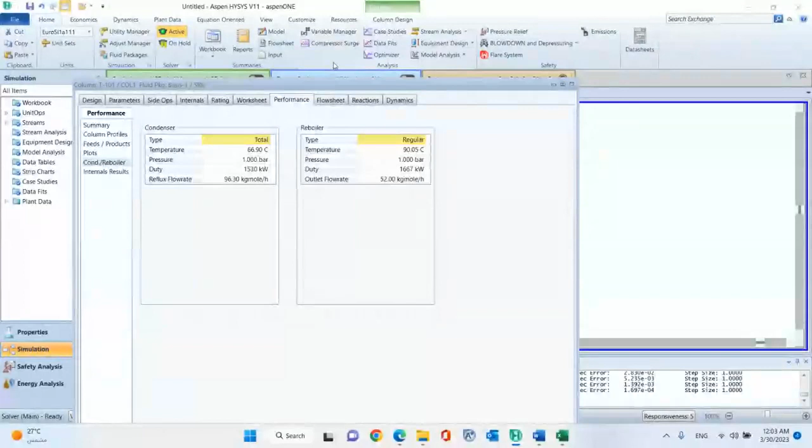In this case, it might be simple. It might not take much time, but for a more complex system, it might take a long time. So I can have an efficient way, which is case studies. So if I click on case study, I will click add. Here I need to define my independent variables and dependent variables. My independent variable in this case would be the fractional recovery of methanol.

I can define the variable from here, from variable manager, or I can find the variable. So I can go and check this is related to, for example, the overhead stream, and I can go select recovery. Main tower. Go to main again. T-101, yes. From the tower here, it is somewhere in one of those. It will take you some time to find the variable.

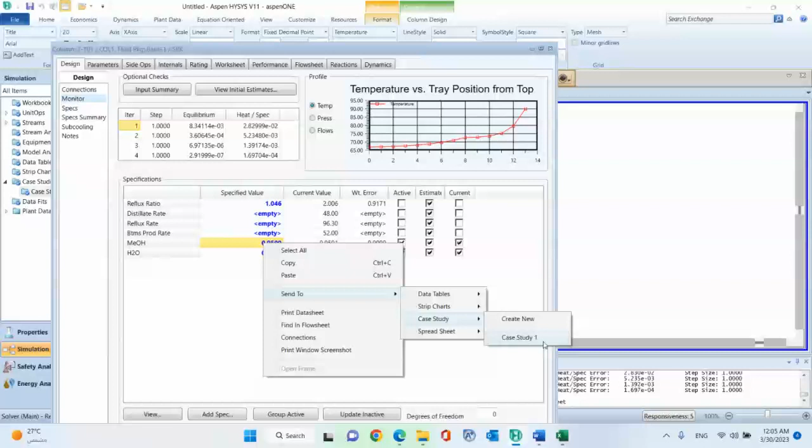So a quicker and easier way is that I can go to the column itself. I can go to monitor, and this is what I want to change, the fractional recovery of methanol. I can right click and send to case studies, then case study 1, which is our case study. Once I click that, I close, I go to case study, and I will see it populated here. I can do the same thing for the dependent variable, which in this case is the reboiler duty.

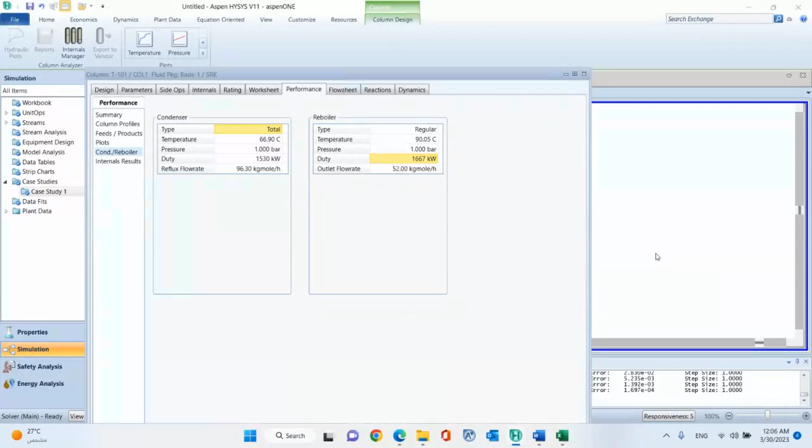I can double click on the distillation column. The reboiler and these things you find normally in the performance tab. We haven't gone through those tabs, I know, but I'm just trying to save time because I think I took much of your time here. So you do the same thing. You send it to case study 1. Once you do that, you close, and then, okay, this is in the independent variable. It should be sent to dependent variable.

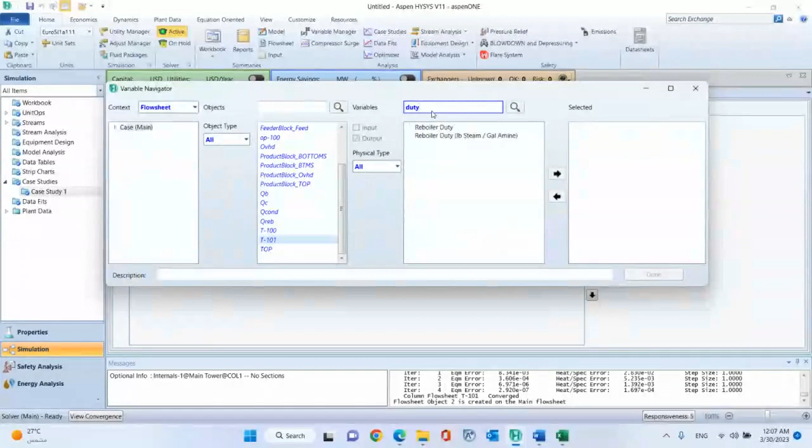Okay, so I will simply go to tower 101, then I will type in duty, and then I will have reboiler duty, and then done. So I define my dependent and independent variables. I will go next, case study setup. I will select the start and end point.

I will just maybe select 0.94 to 0.96, and then I can either select the number of steps or the step size, so maybe 0.005, and then click on run. It will run and give you the results. So I can see, as I change the recovery of methanol, how the reboiler duty is increasing or decreasing. I can see that in a table. I can copy it to Excel, or I can directly plot it. You can see the plot here.

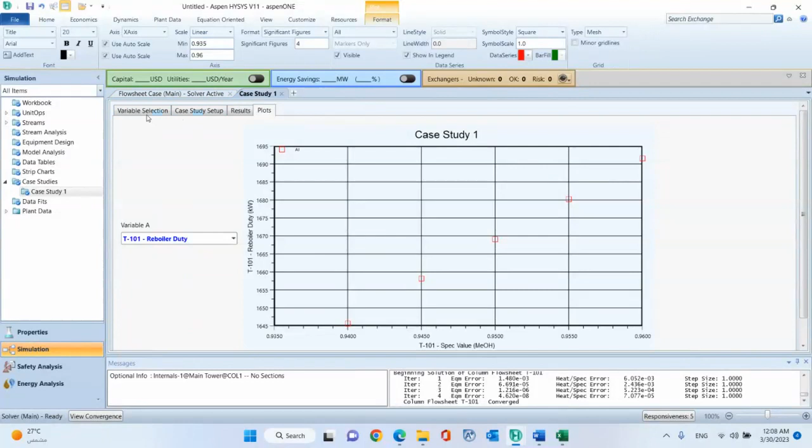So this is how you would normally use your case study. I can add whatever independent variables I need, and then the dependent variables, and then I can simply set up my case study here and then run it, and I should get the results easily. Yeah, so this is basically the case study function. I hope this is clear for you.

If you have any question on the case study. Okay. I would assume it is okay.

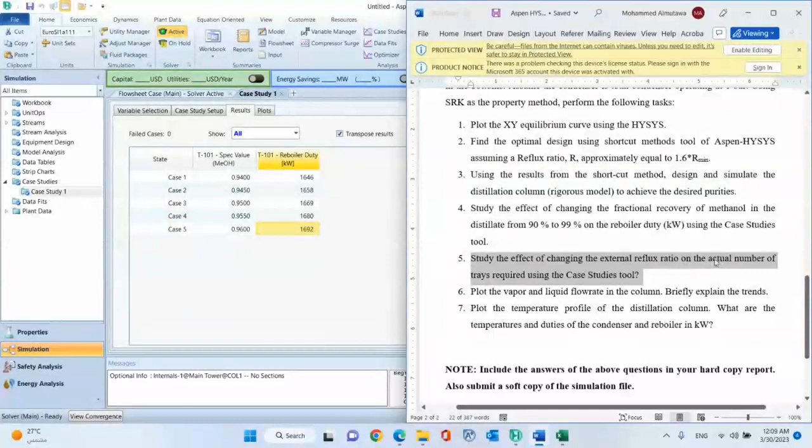So here basically it is the same exercise. You would just define the external reflux ratio, and then you would plot in the actual number of trays, but this would be not in your column, this would be in your shortcut. You would do the same thing. You would use the external reflux ratio as an independent variable, and then you would have your actual number of trays as your dependent variables, and then you will change, and then you will observe your results.

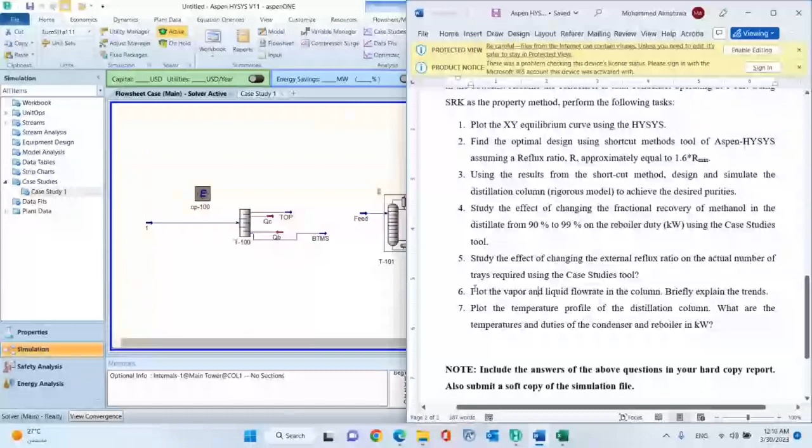So I'll leave that up to you to solve it. Hopefully it should be the same, but if there are any difficulties, you can come back to me for any questions. I'll leave my contact details.

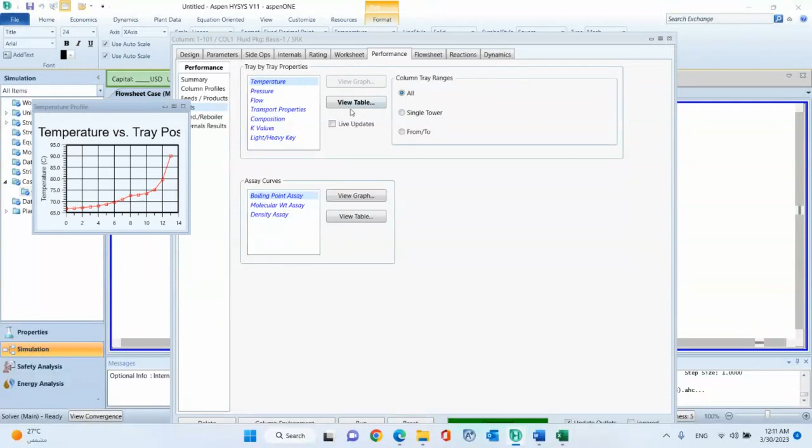Now, okay, we are talking here about plotting. So like plotting flows or temperature profiles, how we are going to do that. So normally you go to the distillation columns, again, you go to the performance tab where it is having most of the results. You can go to plots. Now in the plots, you can plot the temperature profiles. So you can select on temperature and view graph, and it will show you the temperature profile of your column.

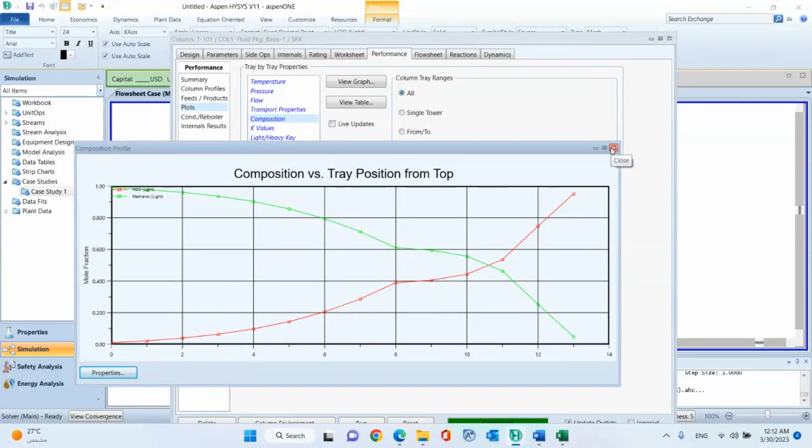What is the temperature on each stage? You can plot in the pressure, you can plot in the flow. So it will show you the vapor flow and the liquid flow. And you can infer information from there. What does it indicate to have higher vapor than liquid, or higher liquid than vapor? Or you can plot in the composition to see how the separation is taking place across the column, how the compositions are changing, and if there is any way that you can optimize.

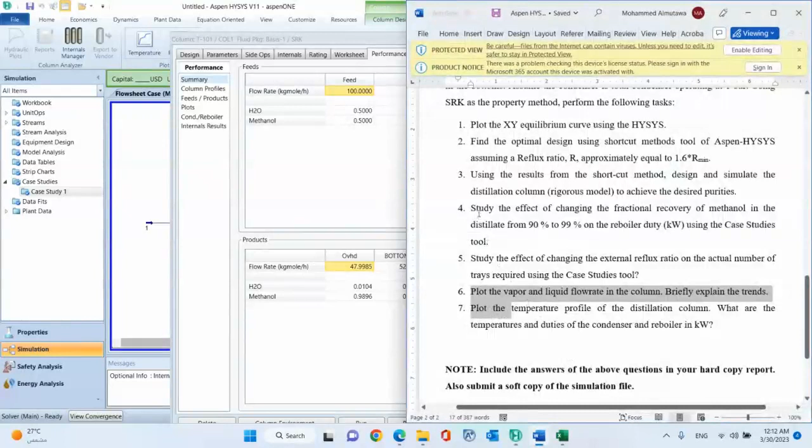And then again, you can view the column profile from here. You can view the condenser and reboiler temperature, pressure, and duties. This is internal result. This is in case you define the mechanical configuration of the column, which is not applicable in this exercise. Yeah, so these are the main results. I think these will cover most of your homework. Actually, all of your homework questions in here.

I hope this was clear. But please feel free to ask me any question if you need any clarification on any of the things that we explained. This is by no means meant to be an introduction to HYSYS, as we will need much more time to really go through the features.

But I just tried to focus on whatever is important and relevant to you in your homework, so that you will get a feeling and understanding of how the simulation software works, and how to deal with distillation columns in a simple manner, to help you perform the analysis that you need in order to get the results that you're looking for. I hope my explanation was clear for you. So please let me know if you have any questions.